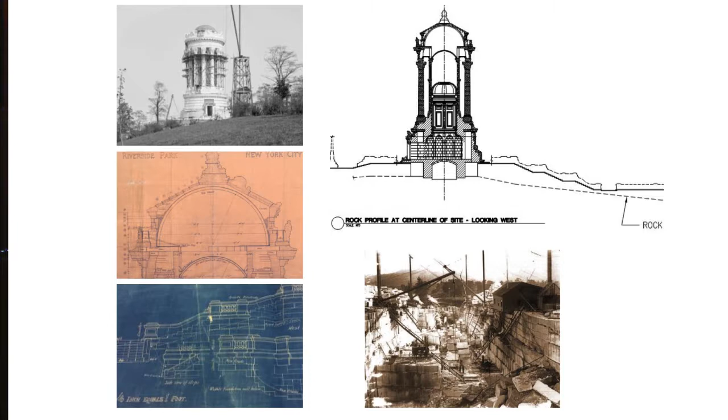We were very fortunate that Parks Department did have drawings. They had drawings from the original 1900 construction, not a complete set. We actually did not have good drawings of the monument itself, but we had the original drawings for the plaza and the esplanade. There was a major restoration in 1960, and we did have a drawing set associated with that. We did a lot of archival research, a lot of photographs, a lot of anecdotal evidence in the newspapers.

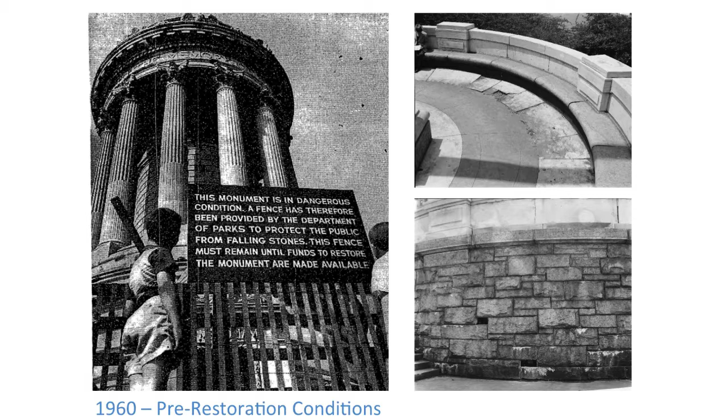And the thing we learned quite quickly was the minute it was opened and put in use, it had problems. It was leaking. They described the masonry as sweating, and we had mortar joints falling out. So for many years, it's been a problem. In fact, so much so that in the late 1950s they actually had to temporarily close it, as you see there. The other important fact was that many of the symptoms we saw in the photographs and documented in the newspapers, we saw when we did our survey. So the same thing was happening all over again.

So Parks, or New York City, did a major restoration campaign in the early 60s. They redid the entire series of plazas. The conical roof, the finial, has marble slabs. They actually put lead sheets on top of that. They removed some interior drainage and did a complete masonry restoration.

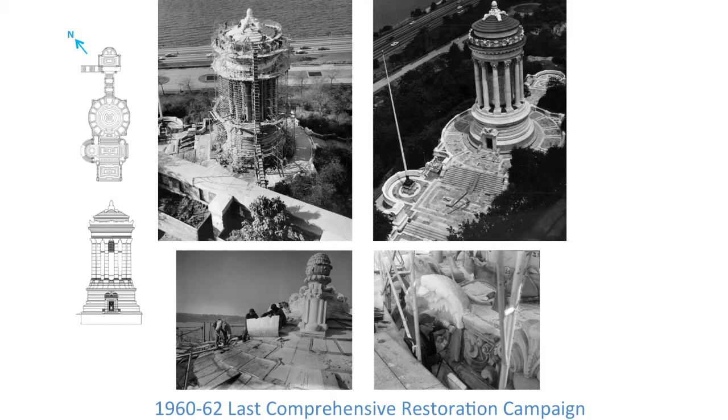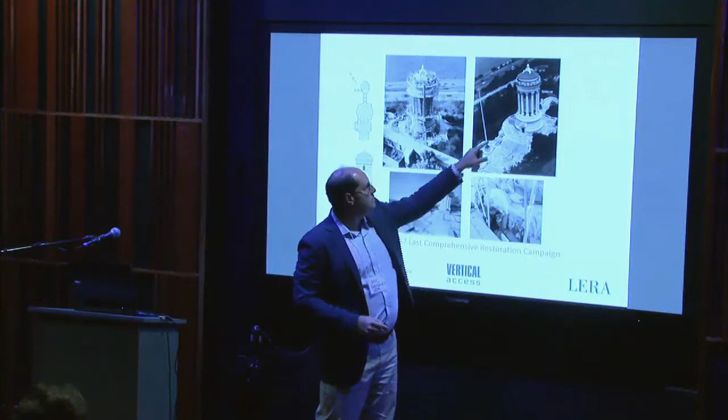In that slide on the upper right, you see a bit of what the site looks like. Basically, you enter from 89th Street right here, and these upper plazas are quite narrow, and there are staircases that go down the slope of Riverside Park.

So with that, oops, wrong direction. I'm going to turn it over to Kristen to talk about how we actually surveyed this.

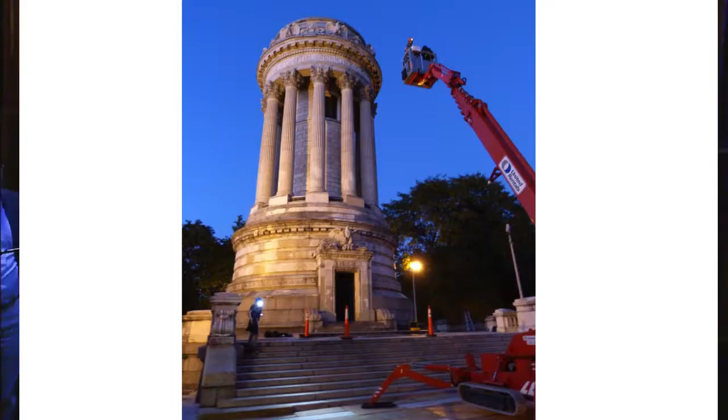Yeah, so Doug just gave a really nice, succinct description of some of the challenges with this site, and the biggest one was access. So you can see that on these plazas, there's a very narrow area that goes around the monument, and what that meant was that with a lift, you really could have only gotten access to about 25% of the exterior. There are no ladders on the exterior, nothing on the interior, no hatch to get out on the roof. So really it was figuring out how to get onto the monument from the outside in.

So we did bring a lift onto the plaza, and that allowed us to install some rigging at the roof in order to use rope access. And so that's what you see here in this image. And having the anchors at the top of the roof and then hanging the ropes on there allowed people to climb the ropes up from the plaza level. Usually we like to go out onto a roof and then use gravity to our advantage instead of having to fight against it, but it didn't happen in this case.

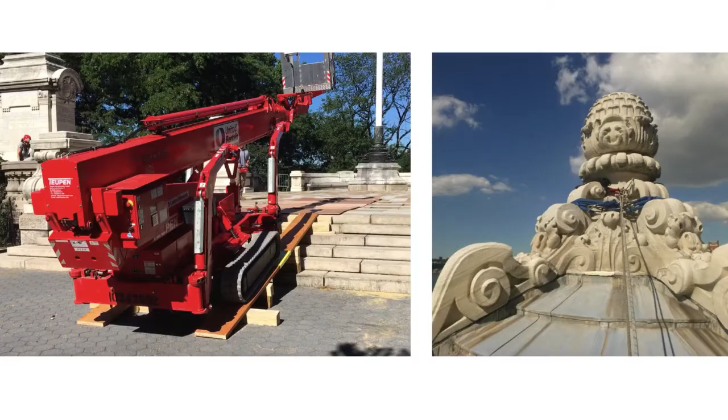So our anchors then consisted of encircling the finial at the top of the roof with padded anchor ropes, and we did build a custom ramp to bring that lift up onto the plaza. And we were very careful not to overload it or damage the plaza in any way.

So this approach allowed Vertical Access and other rope access technicians to observe all of the areas of the exterior and get hands-on to most of it. The areas, once you get down past where the columns are, we didn't get hands-on to that interior wall, but we got pretty good visual on the entire structure.

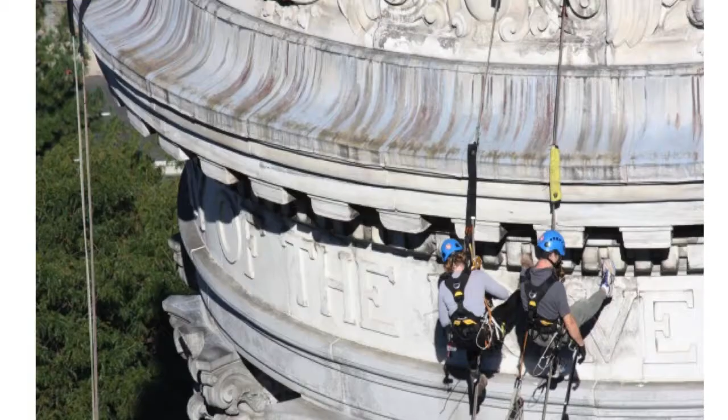And this avoided impacts to the plaza, avoided having to install tiebacks for scaffolding, and also was a minimal visual impact to the monument during the inspection because, as Doug said, it's a really prominent location. There's a ton of people around in the park all the time. And so this also allowed other team members from GB Geotechnics, who are rope access certified, to get onto the structure to do some ground penetrating radar as well as ultrasonic pulse velocity testing.

And then access was also a problem at the interior where, again, there were no interior ladders, and we couldn't get to that space that Doug described that's above the lower dome with the oculus, but below the upper Guastavino tile dome. So in order to avoid having to build scaffolding at the interior, which would have been costly and better suited to full restoration work later on, we flew our drone through that 5-foot diameter oculus with a very skilled pilot. And we were able to gather both video and infrared imagery of that interior space, which you really can't see from below because of the geometry of the oculus.

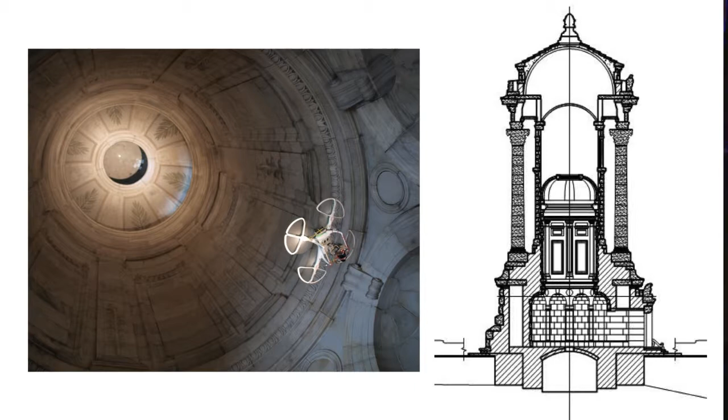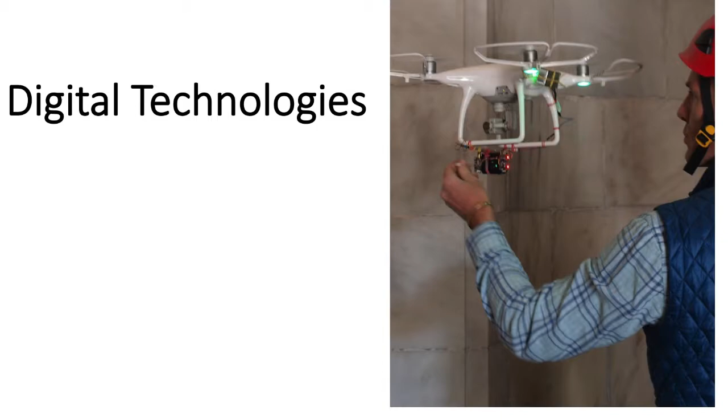So going back to the other challenge of the survey, which was collecting and managing all of this data, it's not a huge building, but there was a lot going on, and it was really important to gather comprehensive information about all of the existing conditions in order to start diagnosing the causes and what the potential solutions would be. So rope access really is just our means of getting where we need to be on the building, and then it's the tools and the technologies that we can leverage on rope that are really what helps us start to understand the structure. So this very thorough documentation of existing conditions was required here at Soldiers and Sailors, and in order to do that, we used direct-to-digital documentation.

So this is an example of one of the photographs that we took where our documentation system automatically renames the photos with the numerical prefix, the XY coordinate where it's located on the drawing, the material, the condition, the failed Dutchman, and the year, and that's all customizable with whatever kind of information you need to have in that photo name. And then our deliverable included over 1,800 digital photos keyed to over 1,000 annotations on the exterior elevation.

So the system that we use to digitally document conditions on site is called TPAS, the Tablet PC Annotation System. And Vertical Access developed this as an add-on that runs within AutoCAD. It's a proprietary software that we have. And basically each annotation is a database entry where as you're surveying, you're prompted to enter any number of data fields about the condition, describing the amount, the severity.

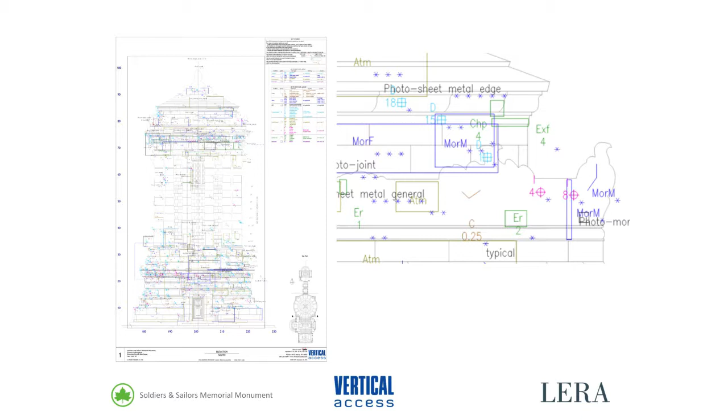So this means that there were over 1,000 annotations that we didn't have to transcribe from paper into digital, and almost 1,900 photos that we didn't have to manually rename or come up with a system for naming. And then using the drawing in a digital format lets you really focus in on different conditions by isolating different layers. So right here we just see all of the crack conditions, so we can start to identify some patterns and maybe some causes of the damage.

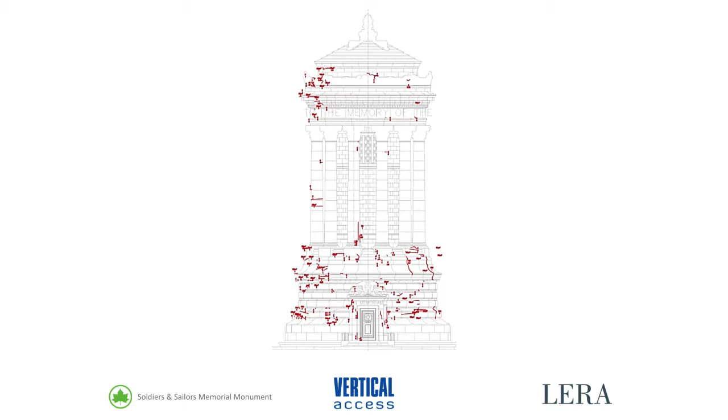And Kate said yesterday that they started using Revit when their clients started to demand it. So right now we're still working in a two-dimensional AutoCAD environment, but I think pretty shortly, maybe within the year, we're going to see some of our clients start asking for TPAS deliverables in three-dimensional format. So we have a plan for how we're going to make that happen. So stay tuned for that.

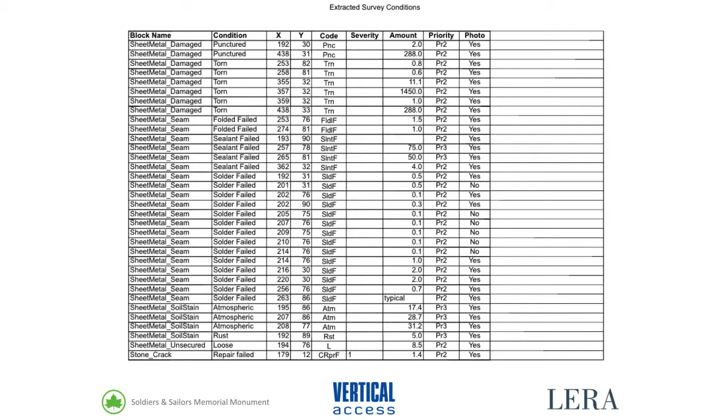And then all of the data that's embedded in these annotations, which are basically database entries, are exportable to Excel, and you can start to sort the data. You can assign repairs based on certain criteria and whatever you really need to do. And then the background drawings for this survey were prepared by LERA based on the existing drawings, which were pretty good but not complete, as Doug said.

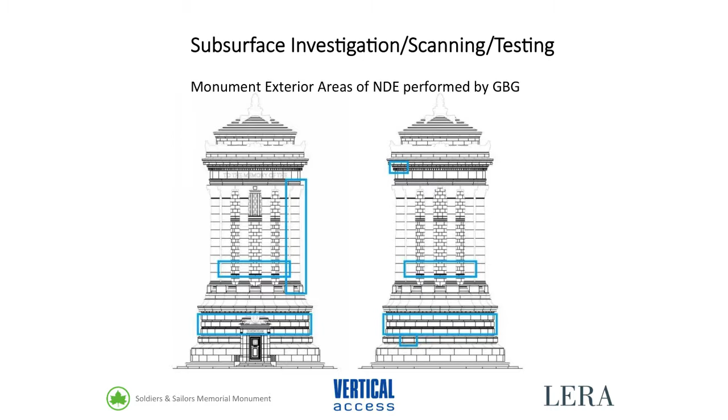And then several non-destructive evaluation methods were also used to confirm the subsurface conditions that were observed at the exterior and the interior. So ground penetrating radar, that you saw those two GBG folks doing, to confirm or help to identify embedded metal. And then they also did some ultrasonic pulse velocity testing to assess the internal integrity of some of the masonry units. GBG did infrared on the exterior from the bucket of the lift, and again, they were only able to do that on about 25% of the exterior because of the limitations of the plaza.

And this is where using a drone would have been really an ideal platform for getting the infrared data. And if you've done infrared, you know that you want to have as close to a 90-degree or straight-on angle of view as possible in order to get the best data. So, standing on the ground and looking up at something tall, you're not really going to get usable infrared data.

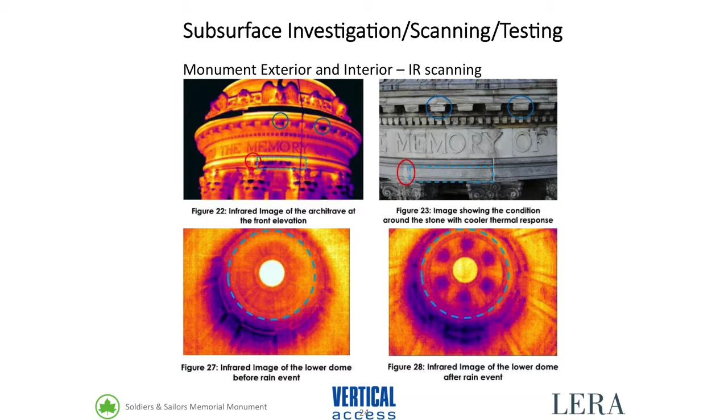So this monument is located in controlled airspace, and we were on site just after those Part 107 rules went into effect, so we weren't able to request an airspace authorization in time to use the drone on the exterior. But the FAA does not regulate interior space. So just as rope access is how we physically get to where we need to go, the drone is really just a tripod, and it's the payload that matters.

And our first drone, a DJI Phantom 2, was mounted with a GoPro camera on a motorized gimbal, and both of those were sold separately. The newer DJI models have an integral camera, as John mentioned, and shoot really nice video. There it goes, right through the Oculus. And so now we have eyes on this interior space. There were a few photographs from the 1960s, but we also really needed to see this space in order to see what the condition of it was now. You can see some of the cracks through the brick masonry and some of the materials that were left up there after the last restoration.

And then we also mounted a FLIR Vue Pro camera on the drone, which is a camera made by FLIR that's meant to be carried by a drone. It's very small. And we used that to get infrared imagery of the interior. We scheduled it after pretty heavy rain in order to increase the chances that we would see some thermal differences in the masonry due to water infiltration. And we did see cooler thermal responses at the joints, which was consistent with the failed mortar that was observed at the exterior and the interior.

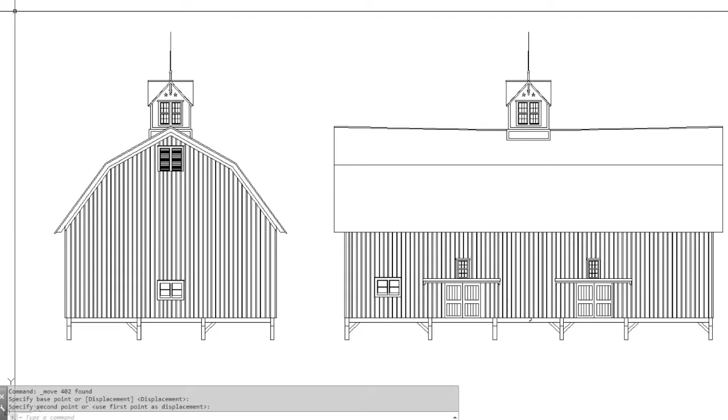And so in order to get really good, accurate data out of the survey, it's important to have a really good, accurate drawing, especially if it's a masonry structure or a terracotta clad structure, something where there's any chance that you might be looking at replacing entire units. If you can visually see where the joint lines are, then it's much easier to make those decisions in terms of conservation. So I'll give it back to Doug for some of the 3D workflows.

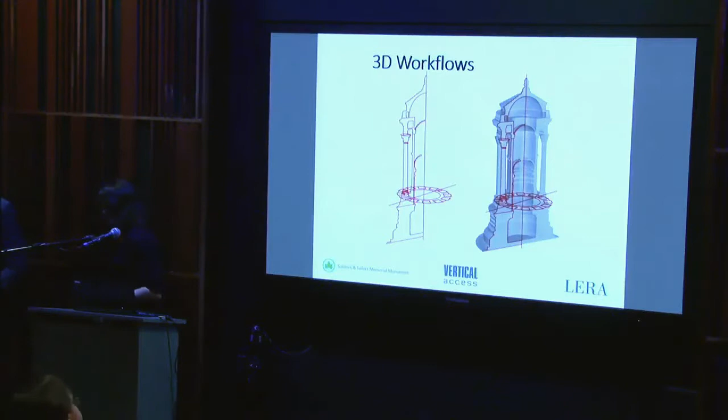So one of the other things we were asked to do by Parks Department in New York was advise how the monument would perform under different load states. So we had to do a structural stress analysis. And being that it's a masonry structure, there's no metal, it's all just compression and mortar joints. It's stone and brick, essentially. We wanted to accurately model the transitions in the masonry, thicknesses, the vaults, and so forth.

If you have experience making 3D analysis models out of finite elements, it's laborious. And for us, we wanted to try and optimize that process. And one thing LERA's been doing for a while is trying to optimize 3D workflows. We deal a lot in our other types of work with complex geometries, and so automation or coding and scripting processes is a part of what we do.

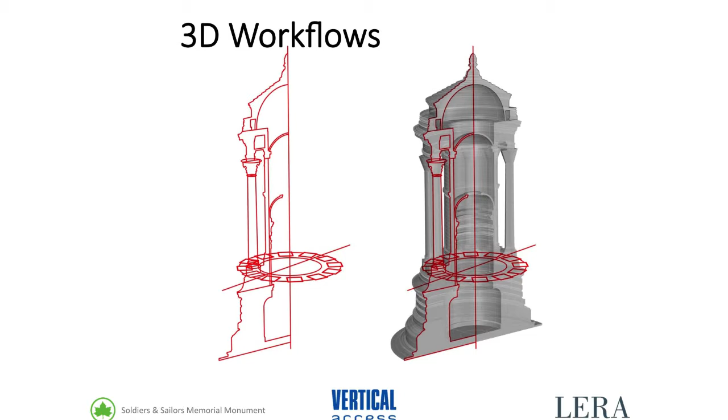So here we had good CAD drawings because we had pretty good original drawings, beautiful hand-drawn drawings. And so that was a great basis for TPAS and for the other work that was done. But to create a 3D model, we needed to be in 3D. And actually, originally we explored using 3D AutoCAD, taking the 2D and making it into 3D. We found that a little cumbersome to then translate, because ultimately what we're doing is translating geometry from one platform to a structural analysis platform.

And so we decided to use the geometry information we had in 2D CAD to generate a Rhino model. Rhino, if you don't know, is a 3D geometry software platform. It's pretty easy to use. It's used a lot in the architectural design field. We're very familiar with it. So we generated a Rhino model of the monument, as you see there. I wanted to go from Rhino into SAP, which is a structural analysis finite element program.

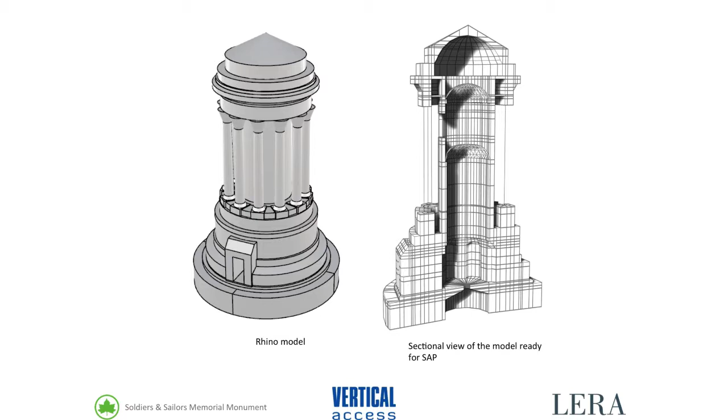To do that, you can't just copy it. We actually had to take each part of the geometry and translate it through coding. We use Grasshopper a lot. Grasshopper is what's known as a graphical algorithm editor. It's a graphical platform, contains lots of subroutines or algorithms in it, and then you combine them. And so you can write code in it as well. And so we have a bunch of these custom built already that we use a lot, and we made more for this project.

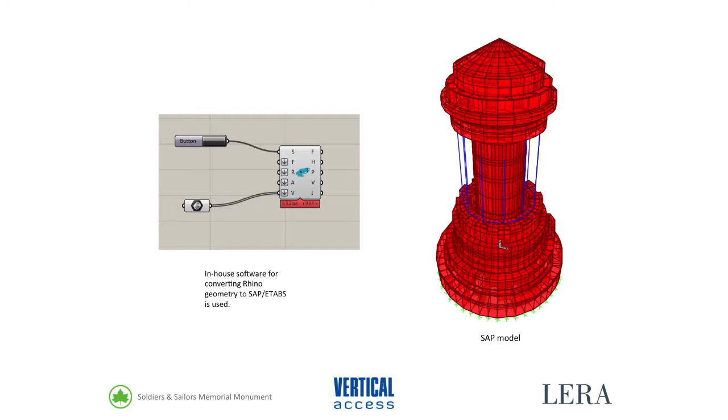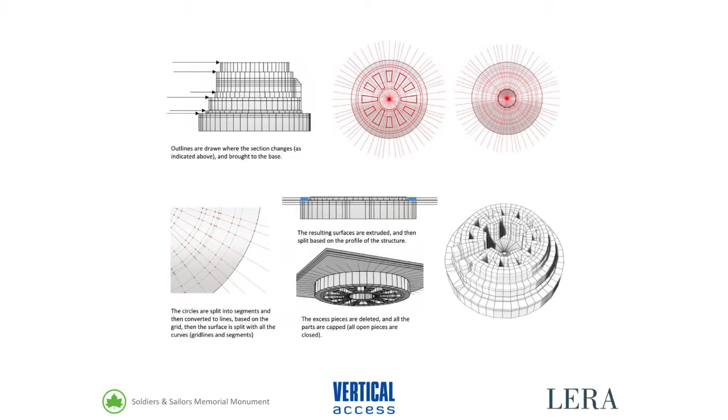So we essentially took different parts of the Rhino geometry, which wasn't necessarily complete. We informed it further. For instance, we knew what the base of the monument was like, but there were also all these voids in there, so we had to kind of add that in. So taking each component and using programming, we were able to build finite elements in 3D that we felt were accurate enough to capture all the different stress flows.

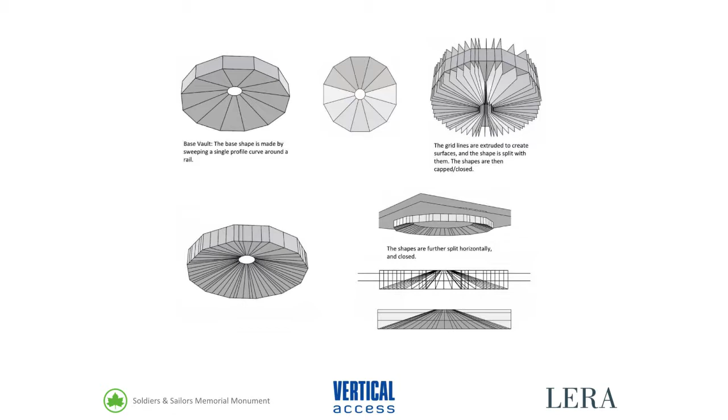The monument is largely symmetrical, but there's the entrance. So there's niches, there's voids. And at the end of the day, we wanted to feel comfortable about stress concentrations and that there wouldn't be areas with stress that we were overlooking. So all the vaults were created separately. There's a base vault, a brick. There's 2 Guastavino vaults. One's the Oculus, and then there's a vault on the very top as well.

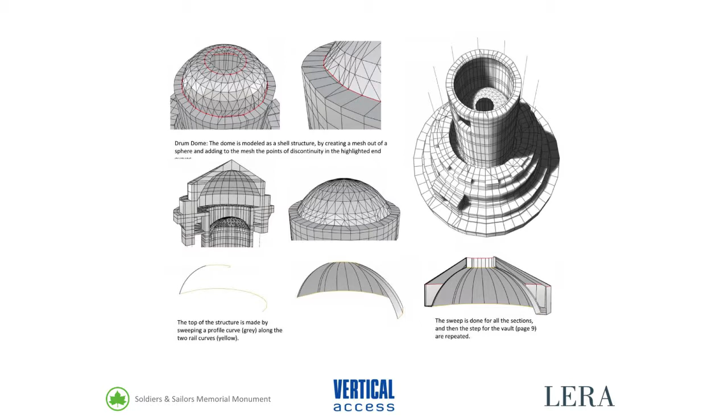All those were created together to create a finite element model that we can then do various stress analyses, as you see. And from that, we can then understand gravity loads, which, as is expected, the monument behaves very well, and that correlates with what we observed. Most of the deterioration in the monument is actually due to environmental factors. We were also able to talk to Parks Department about how it might perform in an expected code earthquake. And so we were able to find good results and look at stress concentrations throughout.

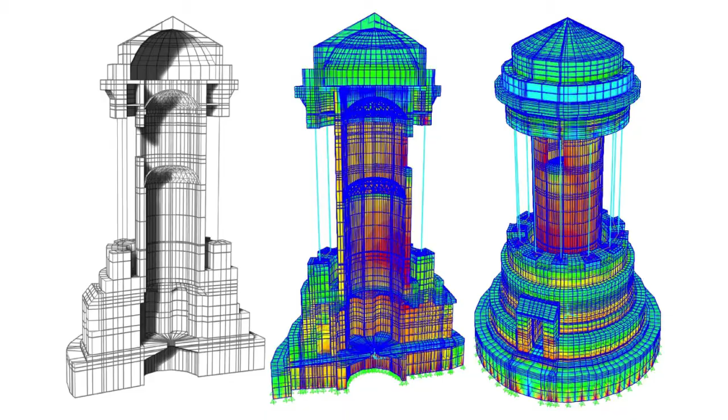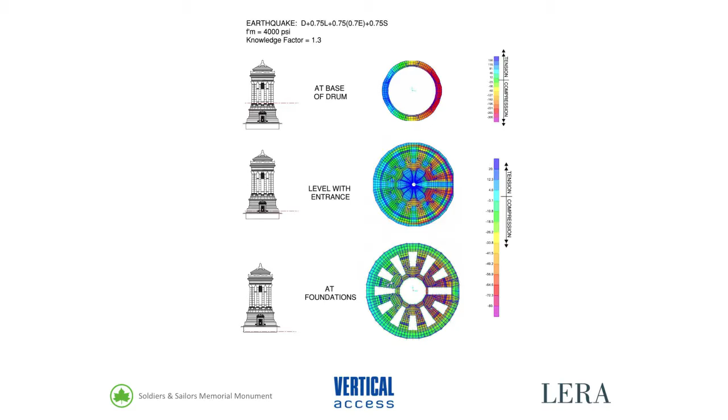So we're able to generate plots like this. So in terms of scale of effort, that was about maybe a 2-week effort to do. And sometimes that can take a whole lot more.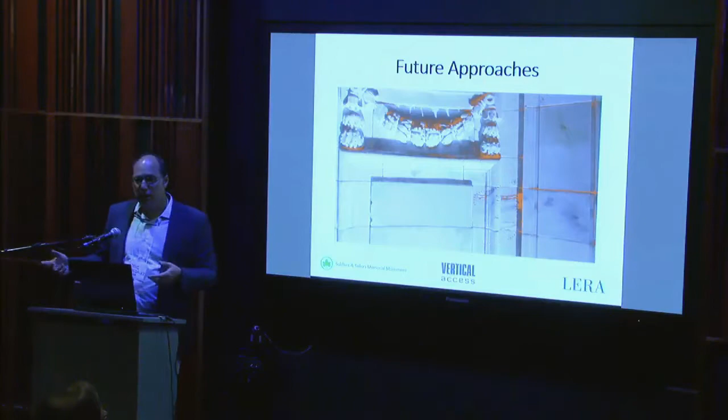Once we did all that, went through the process with vertical access, with TPAS, we started thinking internally about what more could we do next time around. And that's part of our culture, because we have a lot of programmers, we have people that are doing VR, we have people that are thinking about pushing things in terms of technology. But to be clear, our use of technology is mainly on the software and programming side. We're not doing the physical technology, like the scanning and the drone use. So we want to work with partners.

And one thing that was very interesting for us was that on the exterior we had TPAS, and that was hands-on and digitally annotated. On the interior we had a drone and it created all these visuals. Essentially, we had video and we had still photography. And then what we did is look at those on the computer screen and then annotate in CAD our drawings. And so we were debating, well, how can we make that process a little easier for us?

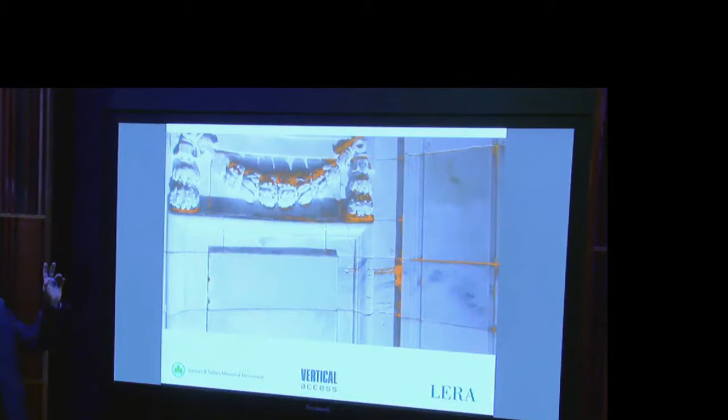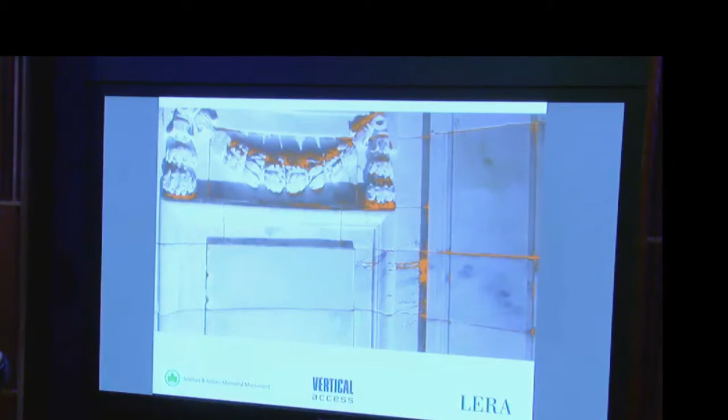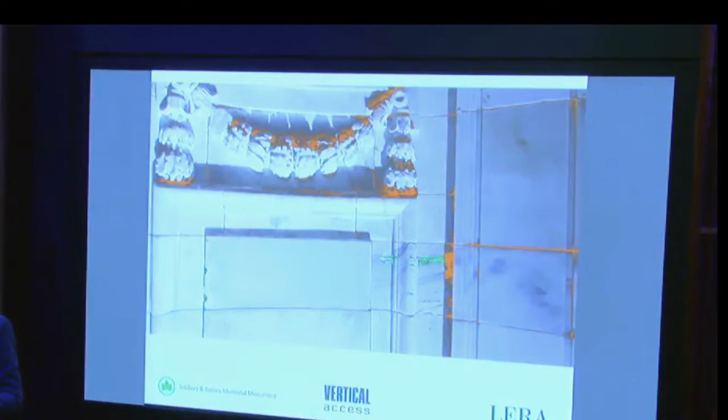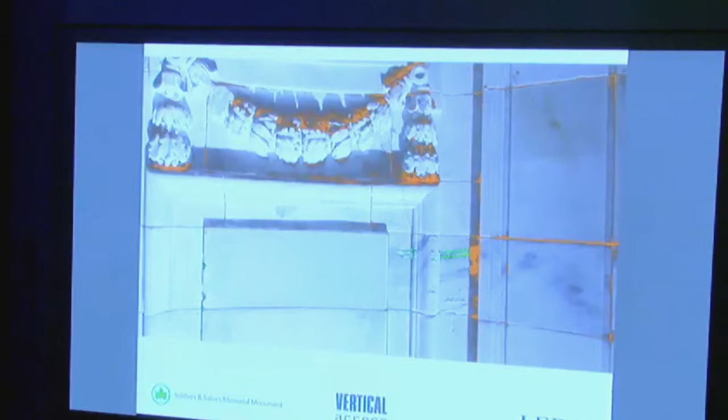And so we've been playing around with coding that would essentially allow us to, using differences in light and darkness on a video image or a still photographic image, identify those contrasts, and then try to understand which of those are cracks. And we have people that are familiar with machine learning, and so we started a process where you can first, with input, trace over a crack, a spall, whatever, erosion area, and then teach the code that that's what that is. And it's a process that works upon itself.

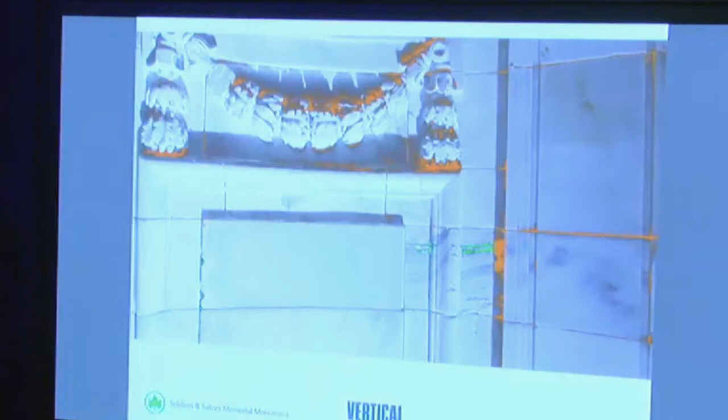And we're hopeful that maybe in the future, when you get projects of sufficient scale and we can build this as a custom algorithm, that we can do that. So that instead of someone being at the screen all the time, it could be someone at the screen watching the process, updating the process, and teaching it.

Now, it's a bit of a tricky debate because there's nothing that replaces hands-on. So what was done outside in TPAS in many ways is similar because you had digital annotation and you had the visual. So we think it's appropriate for places where you really can't get the hands-on as easy, and yet you still want to optimize your time frame. So these are just examples that we've done after the fact that hold some promise for us.

Basically, what we're finding is when you're willing to do coding or programming, possibilities are endless. We've been talking about a lot of data. It's really how you use that data and manipulate it from platform to platform. And the only way to really do that is to do your own programming.

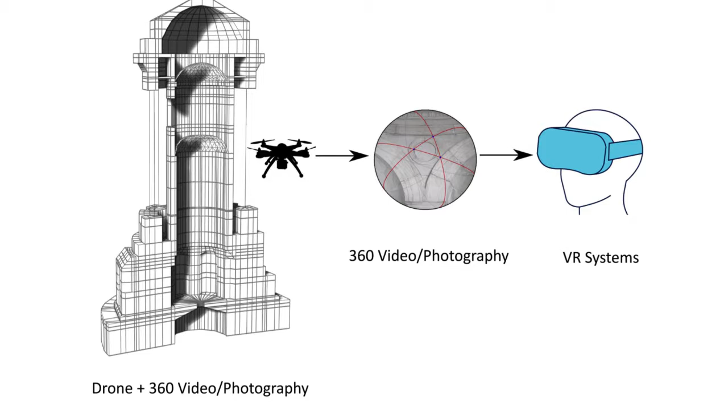Now, to take it a step further, and the reason I show this up here is because a couple years ago, people at LERA became very interested in virtual reality. A gaming background, whatnot, they became interested in using Oculus and HTC Vive and Samsung and so forth. And there's been a growing trend in the architectural design industry to use that to help visualize things. But we've been thinking about how can it help the design process. And so I challenged those people: well, how can it help what we're doing in restoration work?

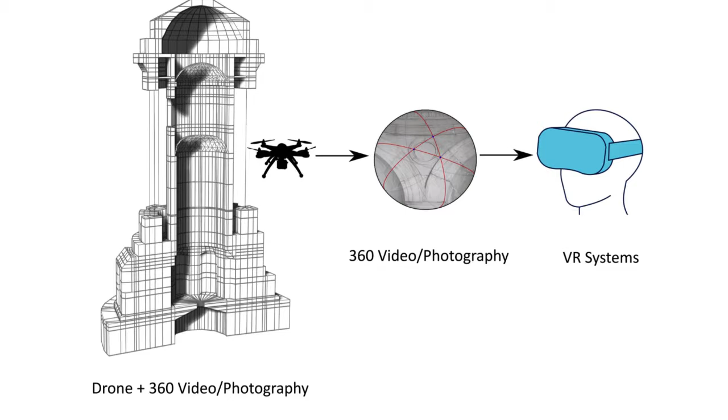And so what we did in Soldiers and Sailors is we flew a drone and we took video, but we didn't take 360 video. But you can do that now. And these are possibilities now. If you can do a drone, take the 360 video, you have it in 3D space, and then use a virtual reality environment, you could potentially, see if I can run this now, work in the 3D environment, which we feel is intuitively a better environment to be in. Once you get used to the headsets and you have your systems working, it's actually quite nice.

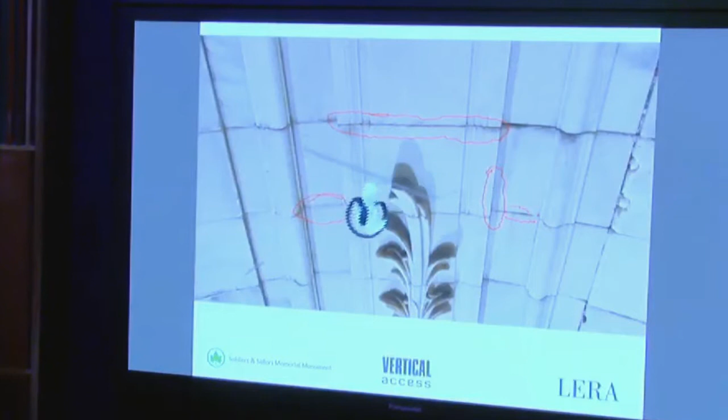And so instead of someone annotating on the screen, and this is whether you're using machine learning or some type of enhanced software or not, you could be in the space and get a better perception. That's the one thing about video and photography, is that it's still a 2D perception on the screen. But when you're in a VR space, you get a sense of depth, which is also important. So ultimately, this is really not to supplant the hands-on, but to sort of get closer to that feel.

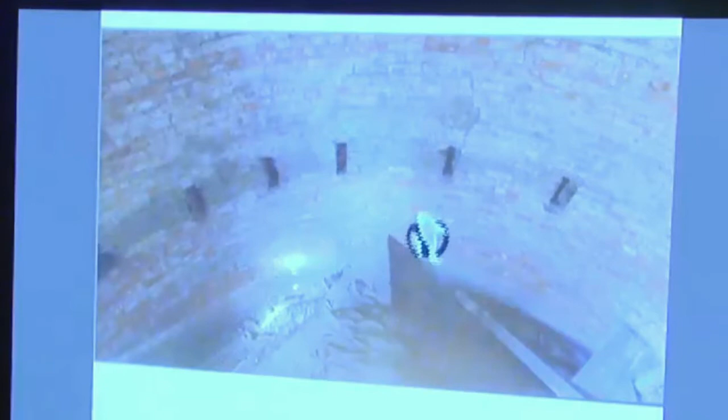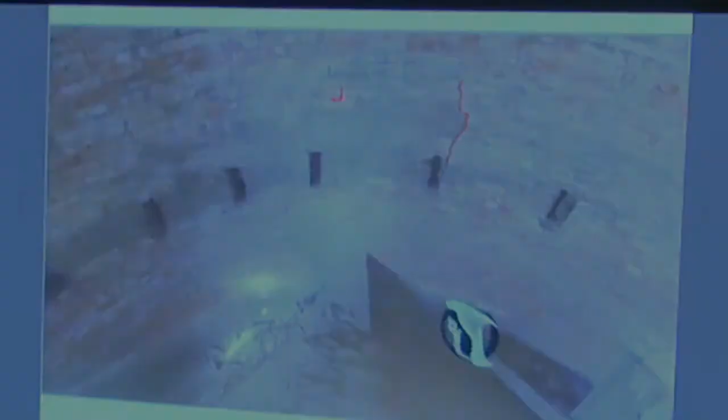So for the work in the interior, we never got to go up there. And the exterior we did. And I think the difference between the two can be telling in some projects. There's nothing going to replace the hands-on, but these are strategies for getting closer to that.